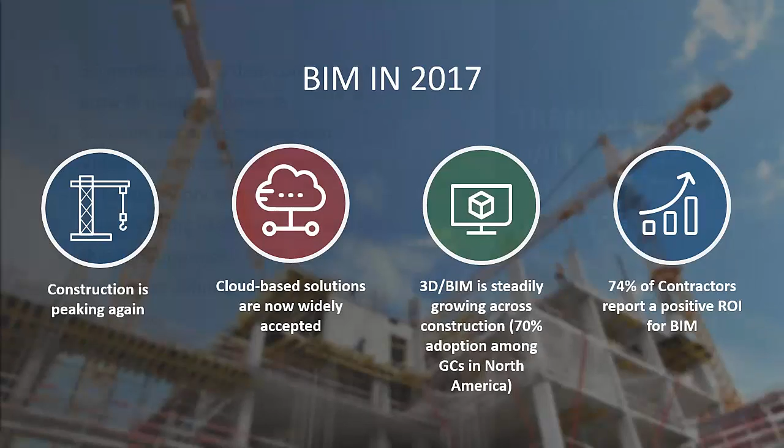Now let's talk about some general trends in our industry. As we said a moment ago, BIM and VDC become more important. So that means 3D models become the centerpiece of where we hang our data. It's important that you can associate metadata with a BIM object. You don't just have the visual of it, but you have all of the properties, all of the metadata, and you can add and modify many more things. That's some of what we will show you today.

So 3D continues to grow. Scanning, another form of 3D, is growing very quickly. Scanning in the past has been used to visualize a workspace or a space to be renovated. It is now used for quality control to ensure flatness of cement floors or the proper dimensions on a steel beam. Some of the more advanced uses today are tracking work in place. I can actually scan an area and get either the area or the volume of material that has been moved. So a lot more applications for scanning. Scanning is becoming more and more valuable to us, and that will be key for us and our Assemble customers.

Finally, video, sensors, and wearables all kind of blend together, and they're all becoming part of the IT framework of construction, making it faster, smarter, and most importantly, safer to perform our work.

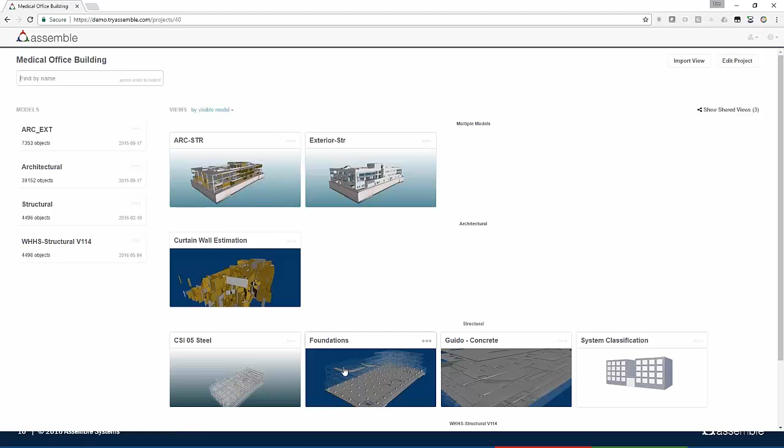So once I've jumped in and I get into the project that is interesting to me, as you can see here, I've got my list of models and then my list of views that are essentially shortcuts to get into the particular components you want to see. So there's no need to go find the current version of the model, download it, have the right software to open it up. It's all right there online for your use.

Jumping back into the slides. The next point Don mentioned, and he talked a bit about the definition of conditioning, is in my mind, we're looking at it as a verb, right? To condition, to make ready for use, means we're taking something that was built for some other practice or purpose and making it ready for our use and our purpose.

Us in the GC space, the BIM guys that have been in this space, we're very familiar with the idea that we're consuming models from the AE community, and the purpose of an architect or engineer to create a model is different than our consumption of that model. So we have to take that data and augment it. Some of that means we need to change how it's organized or structured so that it fits our scheduling purposes. Others means we need to add cost code or subcontractor information so that it allows us to organize the model that way. Any of these alterations or additions allow us to dig more readily into that particular door package that might be interesting to us at a given point in time during the project.

So really quickly, we're going to jump back into Assemble here and look at, I have some interior partitions. And on these interior partitions, the architect did add the type mark, and they've used the type mark to actually plug in that information across all of my sheets. But what's particularly interesting for this application, or what I want to go do, is add the fire rating. And the fire rating isn't here, but very quickly within Assemble, I can start to populate that information.

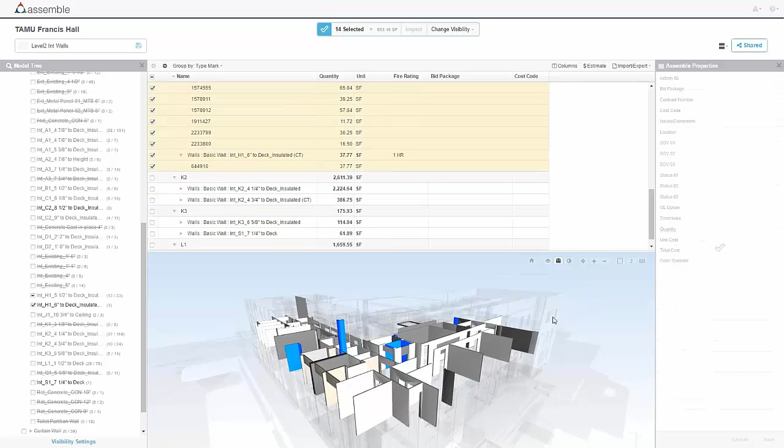Additionally, there's either that way of going through and doing it piece by piece and stepping through the model within Assemble, but you can also, as Don mentioned, work in Excel. Many of those that you work with across your team might not be familiar with models at all, but I think everyone on this call would know that anyone in our industry uses Excel fairly extensively.

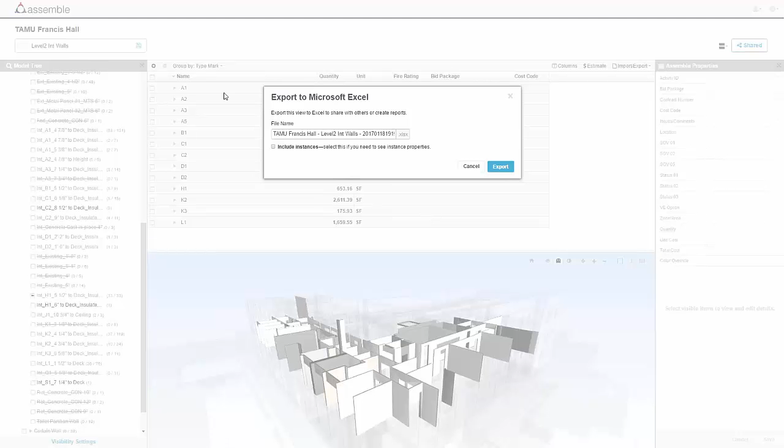So if we take this information out to Excel, we can actually leverage the type marks here and the way I've got these groups set up within Assemble to quickly structure or bring in the data that we need. So you see here, I'm bringing this down, and I've got fire rating that I want to fill in, I've got bid package, and I've also got cost code. I want to go populate these pieces off of my type marks here.

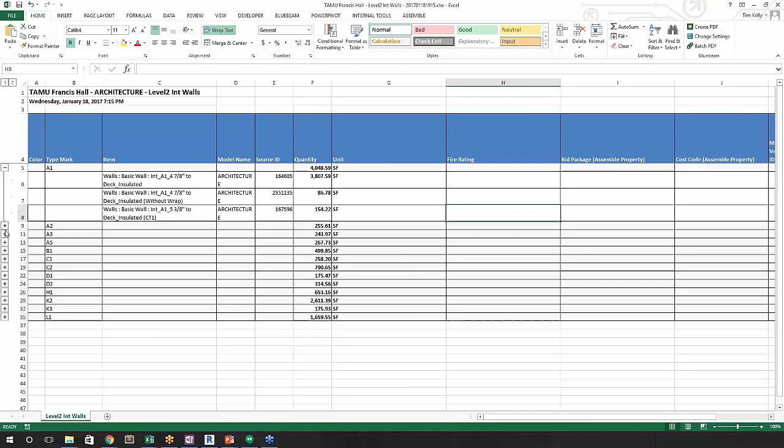So I can step through here, and I can either do this through some lookups if I need, the lookup table type things, or I can just key them in. I've gone ahead and pre-populated this so that you guys don't need to watch me go populate this information here. And now I can pull that back into Assemble.

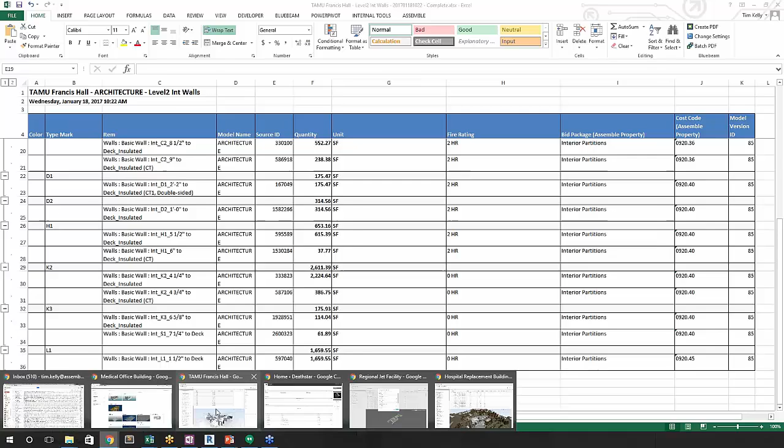So I go in here and import from Excel. I've now conditioned this data. It's ready to bring back into our model. And I can bring that back in right here and accept these changes. And you'll see now this is all populated with that information.

Ultimately, we have that direct connection between our system and Excel, but then also between the authoring system. So if you want to get that information back into the Revit model, you can then move even further upstream by adding that information back into the native file.

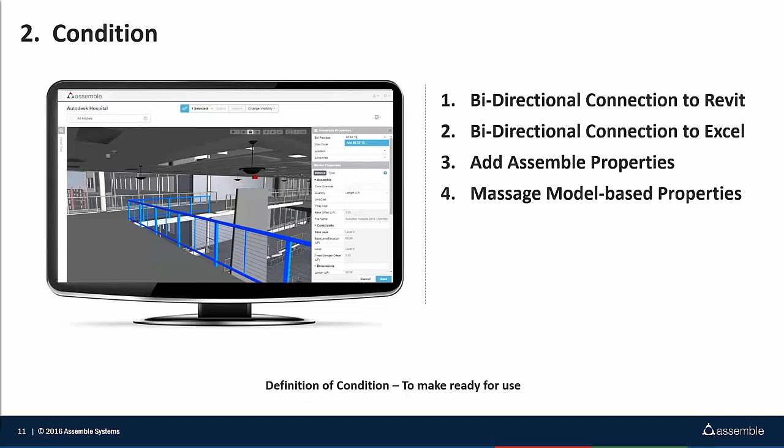So to jump to the next point, Don mentioned connecting to other systems of record. As an organization, Assemble looks at the industry as having some key points or key pieces of software that fit different needs. And ultimately, as an organization, we want to bring in or connect your team to all of that data in a seamless manner.

In my mind, when you go down this path, as you're sharing this data across your project team, whether that's part of your team or your owner or your subcontractors, you have more consumers of that information. When you step through the process of creating more consumers of that information, you ultimately also create more authors of this data. And then when you have more authors of this data, you have more consumers. And the idea there is that you tend to spread this model information virally across your project team.

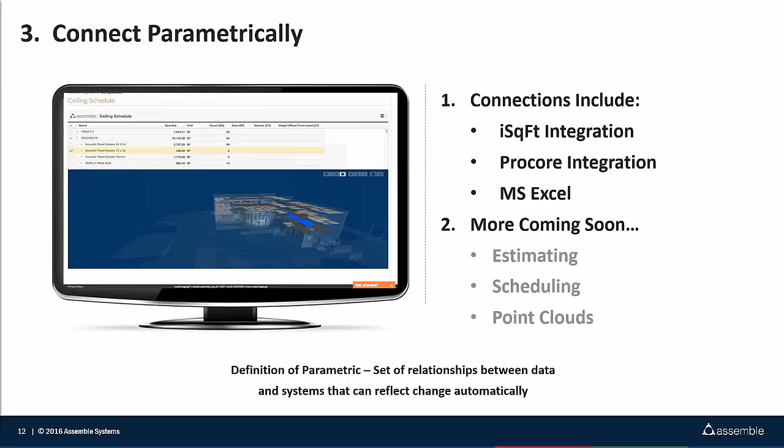Rather than trying to force model information on them, people begin asking, hey, I need this information, and I've used it in the model before, and now I have access to it. It would be helpful to see it in this format. So I've seen this kind of interaction happen across the owners, project managers, subcontractors. Ultimately, the idea is to get this set of project information out in front of your entire team as you step through the construction process.

Let me really quickly show you an example of one of our integrations here. Each of these integration points we're taking iteratively as we step through it. We're going to continue to develop what kind of data we're able to share. But ultimately, I'm inside of a Procore project here, and if you guys aren't familiar with Procore, they are a project document management system that allows you to manage anything from your bid packages to your RFIs to your submittals and project documents or drawings.

And ultimately now you have access to your model views in that same environment. So you can get in here and actually look at your model packages, and I'm going to open up a view from Assemble. And back to that point of parametric connection, this is ultimately creating a view that is a live look into Assemble.

As this is loading, I'm actually getting information that's live within Assemble, not a static point in time. That means if I've updated my model set and I'm looking at the most current model set in Assemble, here within our partner applications you're able to look at that most current set as well. This is our exterior masonry package, organized by activity.

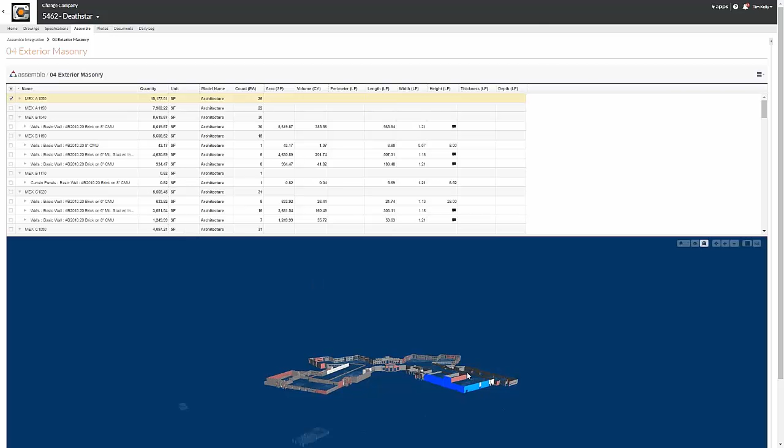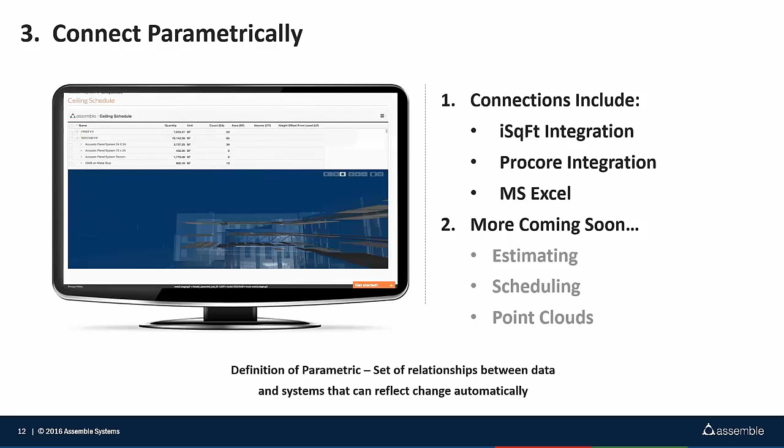Jumping back into our next point in Don's five key points here, we're able to keep a repository of all of your project information in one central location. You can sync and store that data from your different systems into Assemble, and you're able to keep essentially an audit trail as you step through the project.

Combining all of this allows you to have a repository for weekly versions if you want, and then you can analyze that as things change week over week. Whether that's bulletins issued and the models change, or information coming from the schedule or project set in Procore, you're able to look at that information week over week and understand the cost or schedule impacts or anything else related to managing risk on the project.

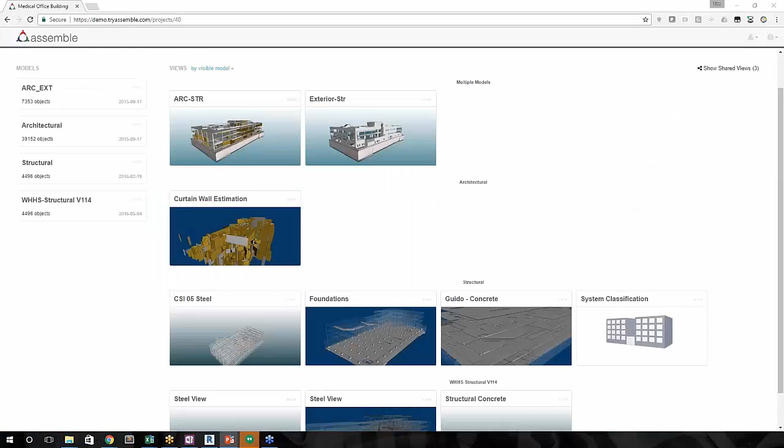It's very quick and easy to look at this, and I'm going to quickly show an example of how we'd look at changes across versions of a model. Each time you publish a model, we're capturing an individual point in time, a version. Each new version published into Assemble is actually a static point, and you can go back to the data set that's part of that version.

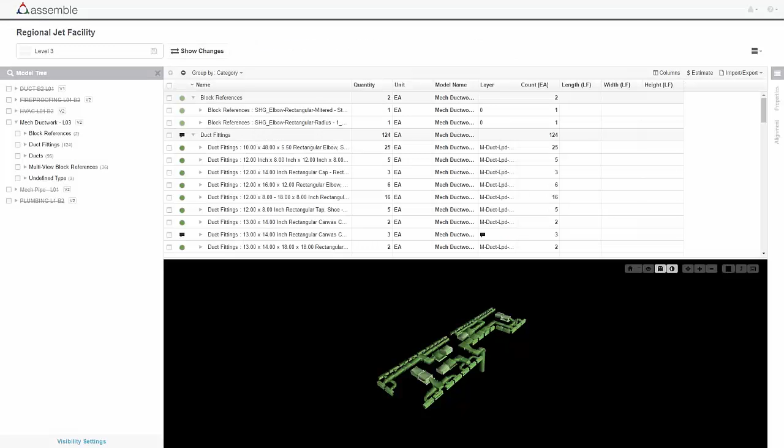When you have multiple versions of any set of models, I've got a ductwork model here for a level 3 on a small area of a project, and I can isolate that and look at the changes between those two iterations. I can look at the changes of any of the quantities, cost impact across those two versions or any other previous versions. Again, that audit trail lets me step back a week, a month, or to the very first iteration of when this model was published and analyze the changes between those systems.

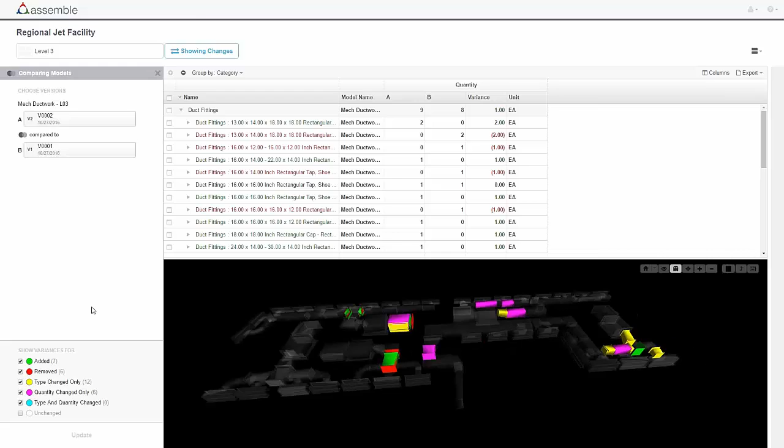Last on our bullet points here is being able to analyze a project as a whole and report on it. Don mentioned before that whether you have one model on a project and you're looking at a small facility, or 85 models or 130 models, you're able to bring those all together in one common environment. When you're able to do that, you can consistently look at a consolidated format of the information you're interested in.

The reporting might be as simple as creating an inventory within our system here, or it might be very complex, taking this out into Excel or downstream into a business intelligence application where you're able to create data analytics on one particular value or across all of your projects, looking at historical job costs. Having all of this in a common data environment allows you to take that look very quickly.

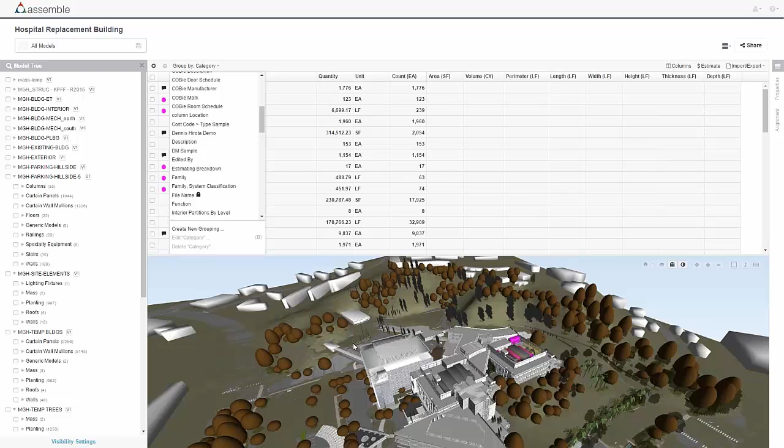In that regard, I just have a number of models here, showing about 12 models in this project, organized currently by category, with all the different models having all the different categories dropped into the same environment. I can change how I have that organized, and you'll see that across all of those models, we're pulling that information together. For a facility, large or small, you have many different models and you may have many different versions, and ultimately we're providing a very clean and concise way to look at the information in your project.

So with all of that said, that can result in cost or quantities, but it can also be quality of the model if you're tracking information for turnover. That can be related to COBie data, and you can dig into that specific data set. Or it can be related to how you're managing bid packages and closing out your model documentation, or reporting on scheduling information and bringing in data from the schedule. The list goes on, and we ultimately can pull in that data and keep it consistent for your team.